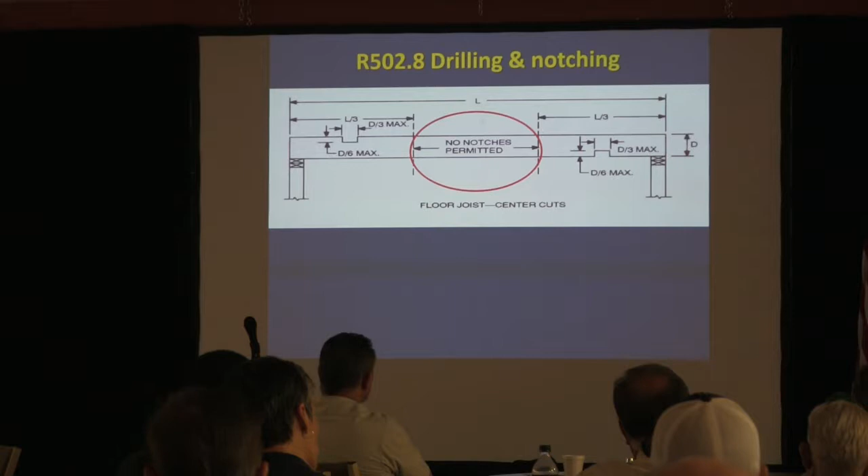Drilling and notching. We know, I'm not going to spend a lot of time, but you don't put any cuts in the middle span of the member, or any notches. You can put holes, but you can't put notches. Why? Because... but why in the middle? That's where you have the most bending, is in the middle. Okay, that's where you can get failure.

And then of course you've got your depth divided by 6 is how deep you can go in there. On the ends you can do the depth of the member, depth top to bottom, divided by 4. You're allowed a little bit more because you don't have as much tension load here, you get mostly compression load here. They come in large cuts, and they come in extra large.

And then, of course, you've got hole sizes for framing members, just like you did the studs. In order to qualify for a hole and not being a notch, you need at least 2 inches of wood on the bottom and on the top. If you have any less than that, it's a notch. And the reason that's important is because in this case, you're allowed to go 1/3 of the depth. You were only allowed 1/6 of the depth, but you can actually have a twice as big opening with a hole because of that extra wood.

And notice how it says actual. So a 2x10 is 9 1/4. Okay, so you divide 9 1/4 by 3, not 10 by 3. Okay, so that's critical here.

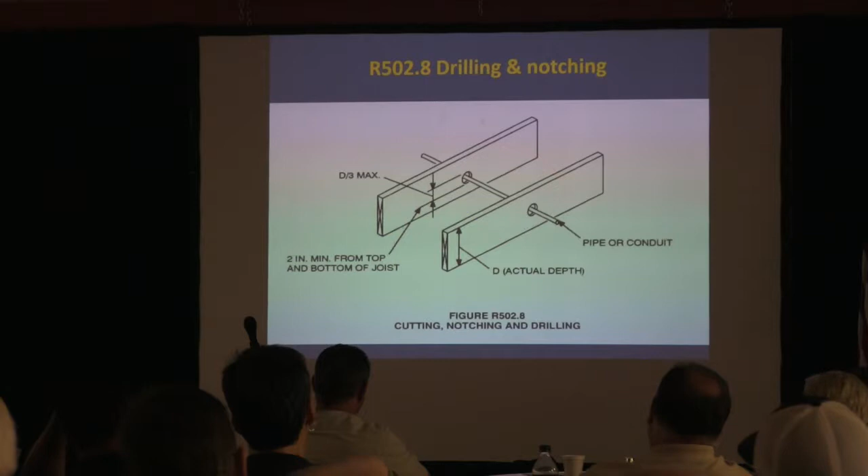And that leads me to this. Okay, so we look at it and you do these little things, and 4 5/8 for a 2x10, is that more than 1/3? Doing the math, it's pretty straightforward, isn't it? Because that's almost half, right, of 9 1/4.

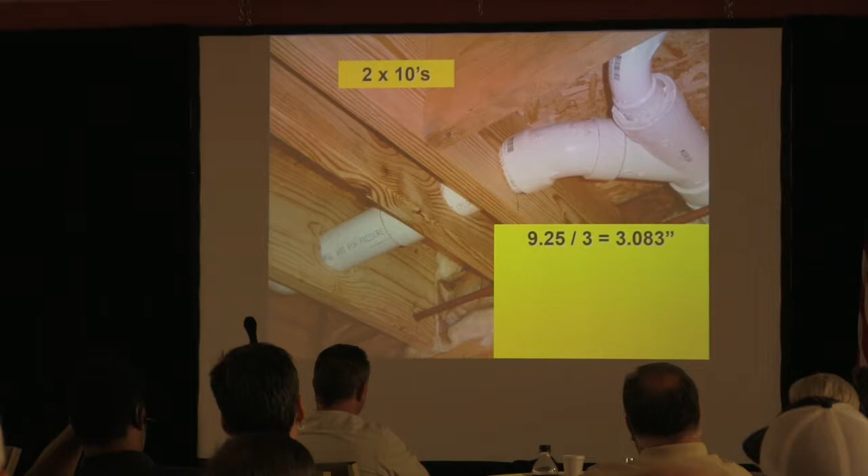And then you see multiple cuts in there, and I just wanted to illustrate this for 2x10s, that if you got 9 1/4 divided by 3, you're a little over 3 inches. So bathrooms, minimum requirement for a commode is 3 inches for a water closet, they call them. They usually use 3-inch Schedule 40, right? Well, the ID of that is just under the maximum hole size. The OD is 3.5. So if you've got 3-inch pipe, you have violated it for a 2x10. Okay? Don't hesitate to sit there and tape it. If it's 3-inch, write it up.

And then, remember, is that 2 inches from the edge? Yeah, from the top, you're right.

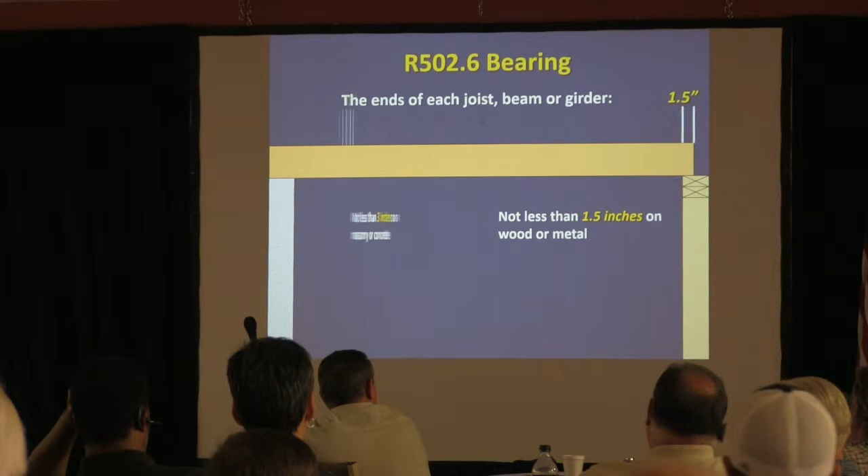Bearing is important too. The ends of each joist, beam, or girder, so that it doesn't discriminate, need 1.5 inches, okay, and that's wood or metal, but it's 3 inches on masonry or concrete because this is much more brittle. If you brought it there, it could shear the corner off. That's why, so you need more surface area to spread that load out.

And you know, I got the question yesterday, yeah, but where's the plate? Well, you may run over to a garage floor. It may run over there or something. It may run over to an area where the plate's on top for the wall, and there's no plate right there. So I've seen it run into a crawl space to just a little divider wall or something like that. You don't see it too much.

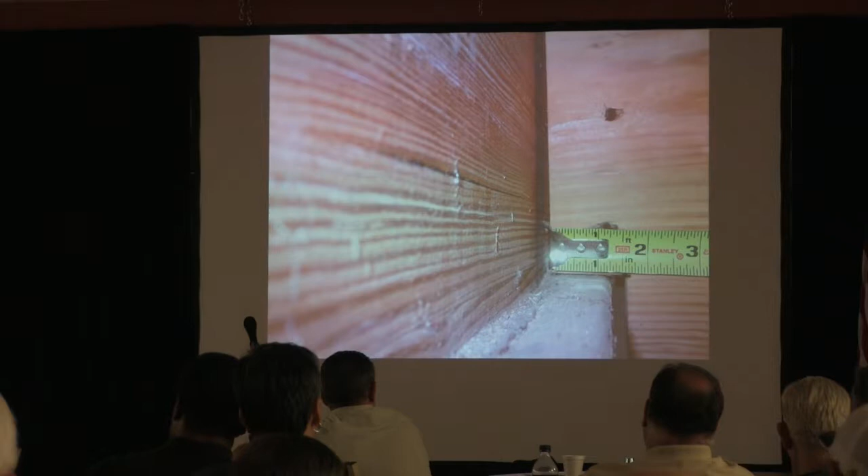These are the great ledger strips there, that aren't really an inch and a half. They're quote unquote 2x2s with the round edges. If somebody ripped them, they're probably going to have enough bearing, but when you buy these ones that are rounded, they're not enough. You're supposed to be out here and you're here.

Also, look under stair landings for bearing. So right here, they probably should just get some joist hangers in there, right? Especially older construction. Huh? Especially older. Oh yeah, you'll see it all the time.

This is new to the 2012 code. I think it came out in 2009. Have you guys ever seen this in there?

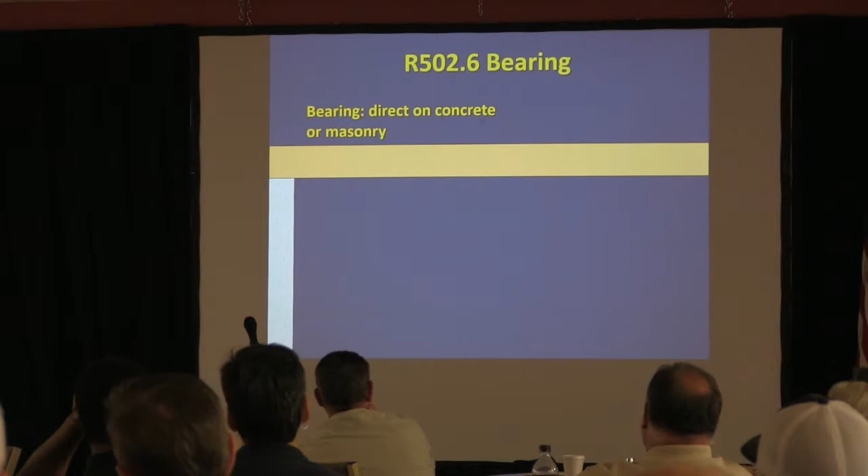When you're on a sill plate, the plate has to be 48 square inches. What are they talking about? What they're saying is if you use a 2x4, it's got to be at least 12 inches long if you're putting something on it.

You're going to see this violated almost exclusively in crawl spaces where there are piers. Almost always. Matter of fact, there's a code change about that. They're actually addressing it for the 2018 code to give a very specific size, because they're tired of looking at the shims and everything else that are falling out.

Well, I've seen them cut the ends off a 2x10, just an inch, and use that to hold up a lumber. Yeah, exactly. It's just a misunderstanding of load transfer. What they're doing is creating a surface area to transfer the load. That's what they're doing.

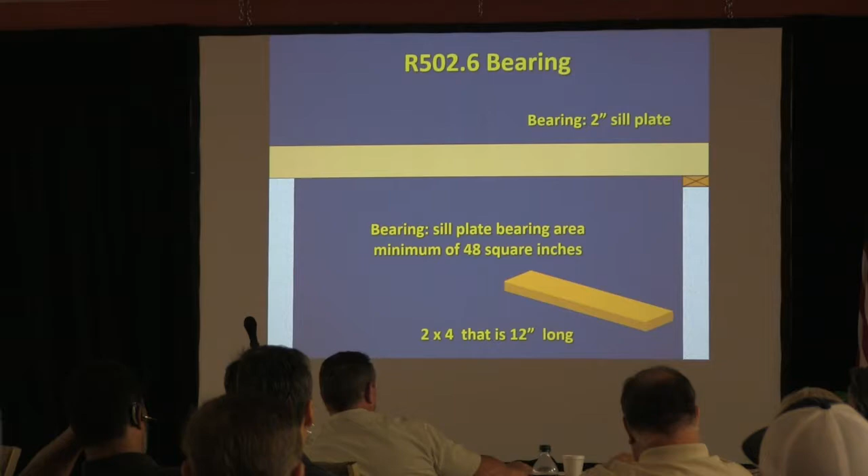And what if it was a 2x6? How long would it have to be? Shorter, because you only have to get 48 square inches. So 48 divided by 6 is... hey, you guys are getting it.

I wanted to show you something that was actually added to the fastening table. If you're using a ledger strip to support joists or rafters, you've got to have 3-16D nails at each joist or rafter. 16! Wow. You think that thing's going to stay intact and not split?

Not if they use that little rounded one. So it's probably just better to use a joist hanger. It used to be. Huh? It used to be. Back up.

It's number 31 on that table, the big table right at the beginning of chapter 6. Do you have permission to move on?

Mr. Jewett, remember the old Forest Products manual for decks? Oh yeah, and it said in it that you can't drive enough nails into that 2x2 to support the deck load of 40 pounds a square foot. That's why I was surprised it was in the code, because I remember Keith and I asked a bunch of engineers one time, and they said the same thing.

The 2x4 ledger? No, the 2x2. You got a 2x4 ledger, you're all right, but a 2x2 ledger... oh, no, 2x2. Yeah, that's what we're talking about.

Well, where's your nail location on the 2x2? On each side of the joist? No, it's supposed to be right underneath it. Right underneath, 3 of them.

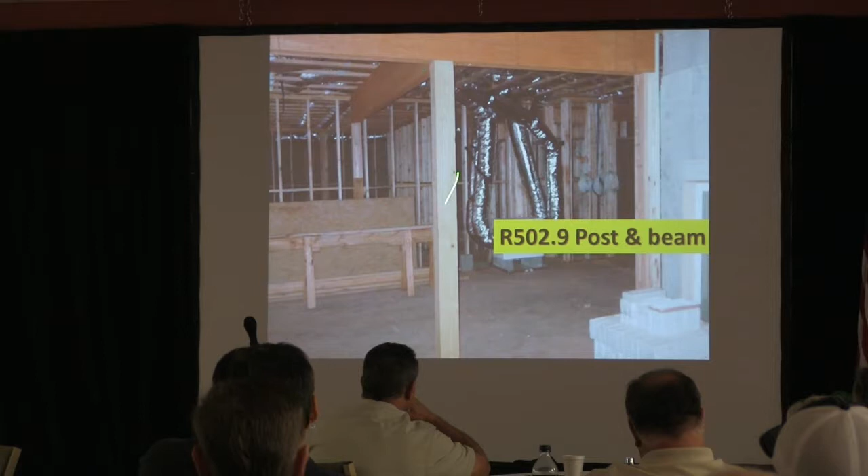See, what happened in this scenario is they overspanned because they picked up this load here. For some reason they realized they needed to build this, this was a custom house. They popped this in and this thing started deflecting, so they put a post in.

The problem is you cannot achieve that positive attachment through toenailing. All right, is this sitting on some kind of base or is this sitting on a concrete slab? That was another story. That was another story.

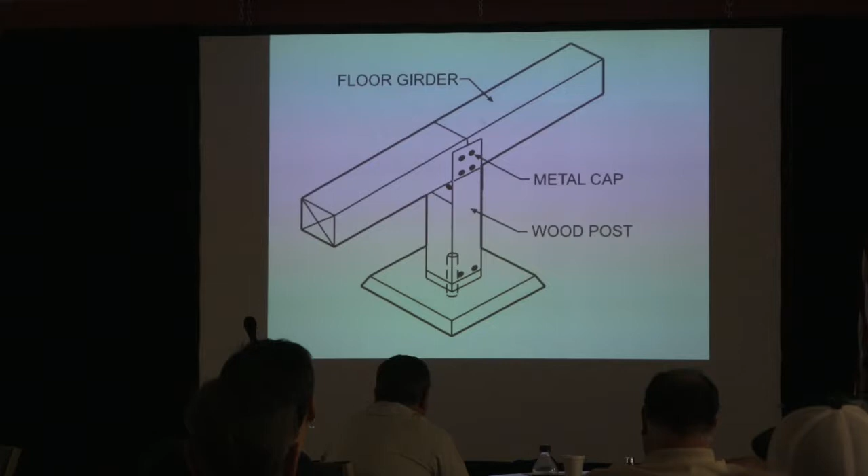Yeah, but that positive connection is for uplift and lateral loading. And what would that look like? Well, they attached it with a staple. Well, I'm glad you asked. See, I'm anticipating, you know why? Because I've done this so much. Put the metal cap on it now though, isn't it?

All right, let's talk about this. According to my sources, this is still a prevalent issue here. If you guys heard this last year, you can tune it out, but if you want to be reinforced, new guys, watch this.

So if they've got a joist hanger, everything's cool, right? Got an issue here. Simpson has a publication that says when you have a joist, you've got to cut it to the correct length. Don't shortcut it. You need to make sure that thing's not shortcut.

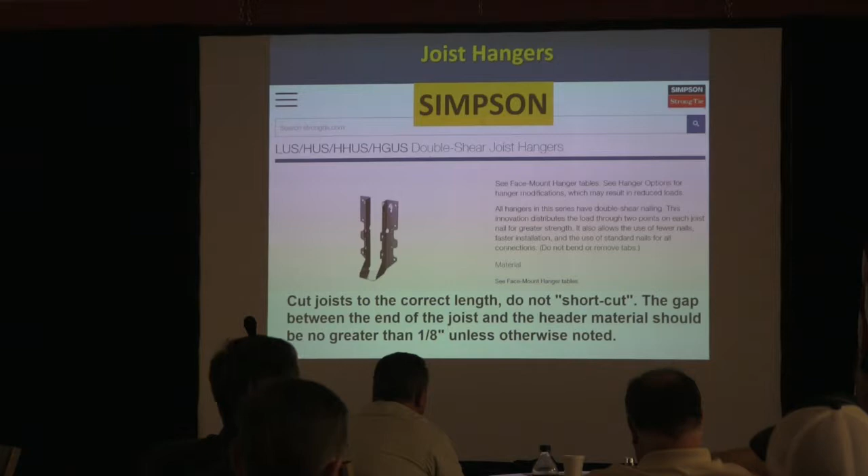The gap between the end of the joist and the header should be no greater than 1/8 of an inch. Got to be tight. USP also does it, and trusses are in the mix. This would be engineered I-joist, trusses, joists, any type of material that has a bearing capacity in a design, you cannot have a gap more than 1/8 of an inch. So they can't just be sloppy. Truss members have to bear fully in the connector seat, be cut to fit against the header, and the gap can't be greater than 1/8 of an inch. That's the industry standard.

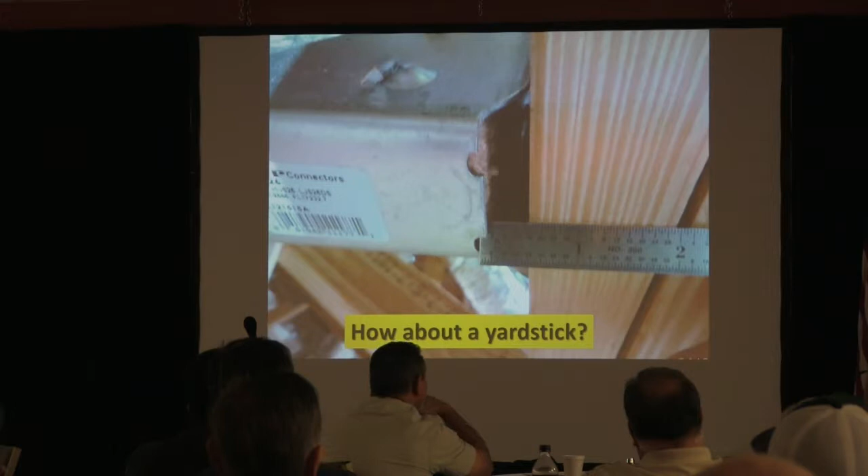And then you see this, and I think we could say that sometimes you might need a yardstick to measure that, right? That's a joke. You guys are tuned out. If it's a deck, you might need a yard. Yeah, that's true. But you can see that these things all are over 1/8 of an inch.

Why is that an issue? Simpson has a nice little publication in their technical notes that basically says that if you have a properly installed joist here, no more than a 1/8-inch gap, you've got proper load transfer from the connector through the fasteners into this beam.

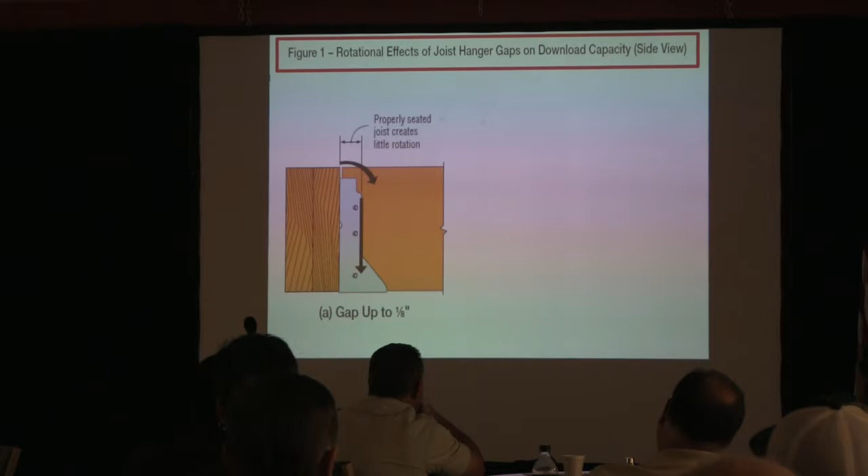Now, the nails they provide are 2 5/8-inch long nails, and they can go in straight, but what about when you toenail? Is there a different approach? We're actually going to deal with that. That's double shear nailing, coming up next.

One thing to be aware of: down the road we're probably going to see some issue where Simpson, especially for decks, will want to go with screws, because you're not supposed to use any fasteners subject to withdrawal for decks, and those hangers are subject to withdrawal. Just throwing that out for food for thought.

So anyway, if you go greater than 1/8 of an inch, now your load's sitting back here. You're not fully seated. What it does is actually create more downward twist force here. That hanger was not designed to take that, because it's supposed to carry the load spread out. It's similar to when we were talking about concrete, you're spreading it out, but now you're just on the back. It wasn't designed for it.

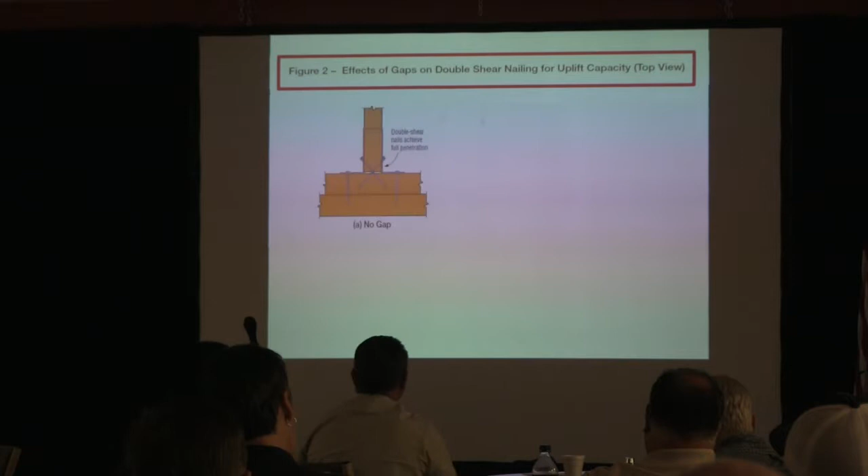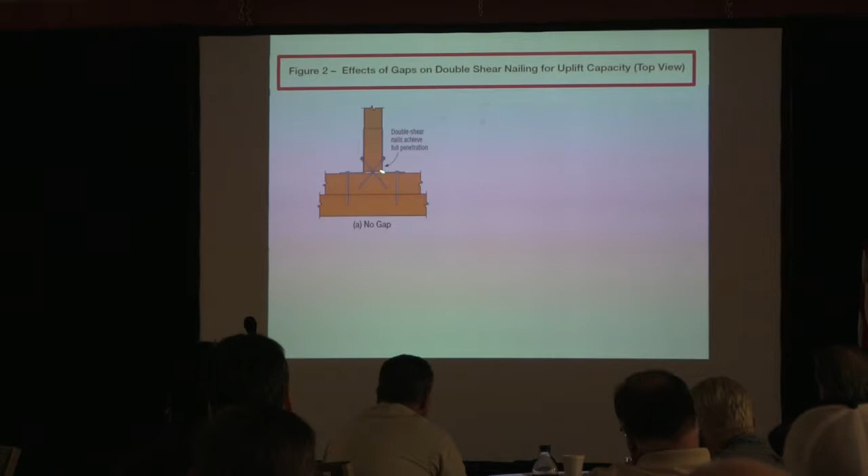And because you asked for it, double shear nailing. If you have no gap, you've got your nails coming into the side that you attach, because it's not just to put the joist in the slot, you also have to connect it to the hanger and bring it into the framing member. This is fine, you've got good wood coming on each side, and that's called double shear nailing.

You get a scenario where you get a small gap. Look how much less wood you have compared to here. That's what's happening now, you're only picking up less, and then if you get too far, you have no nail penetration. So you're really not supporting it the way that connector was designed. That make sense?

Because I want to show them repair options, they show, the question is how to repair it. I would just say to your builder, if they ask, or your client asks, recommend checking Simpson's technical bulletin, give them the number, and see if there are repair options for what you have.

Good way to put it, keep it vague. You didn't tell them how to repair it, you referred them and said see if you have any options there.

One option is you take the hanger off and put a wider hanger. Instead of a single hanger, you put a 3-ply hanger, with blocking on each side - I hate the word scabs, why don't they just say sisters - and fasten it, pick them up, and now these go all the way to the end so you don't have the gap. That's one repair option.

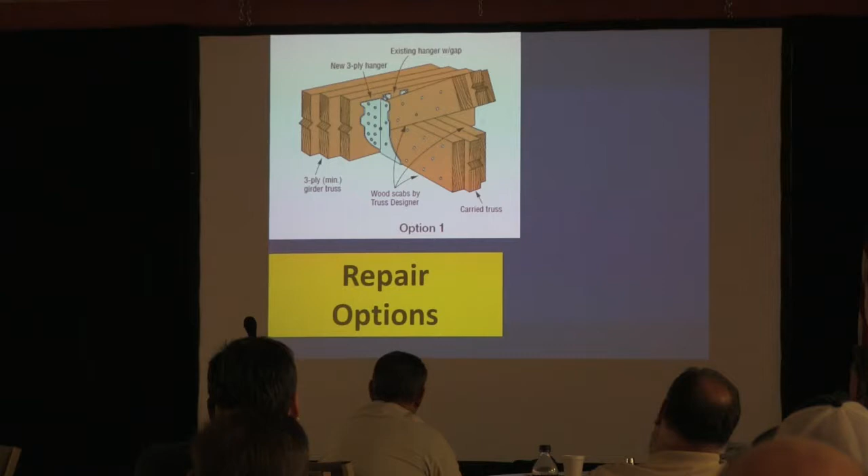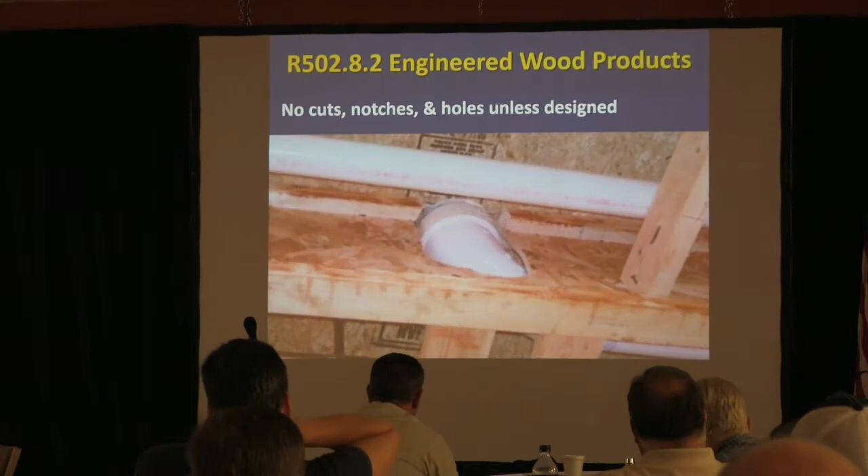I know we're on floors, but we'll talk about roofs too, because hangers can be used for either. With engineered wood products like I-joists, we have to be careful about cutting these things. That kind of stuff happens because most of the time the framer started at the wrong end of the house.

Everybody blames the plumber, but in this case the plumber had a water closet - there's only one place to put this. So it was really a framing issue.

Do the framers have wiggle room, even if they say wait a minute, this was an architectural plan - you didn't do it? Maybe they didn't put the joist in the right way.

Note that almost all manufacturers, this is Weyerhaeuser, will allow you to shift that framing member up to 3 inches. You have to be careful - make sure you support the floor sheathing - but you can shift it over 3 inches with one member, it's okay, rather than compromising that top flange of the I-joist. Maybe you end up having to do another joist if there's a pipe or wires in there, which is a pain in the neck.

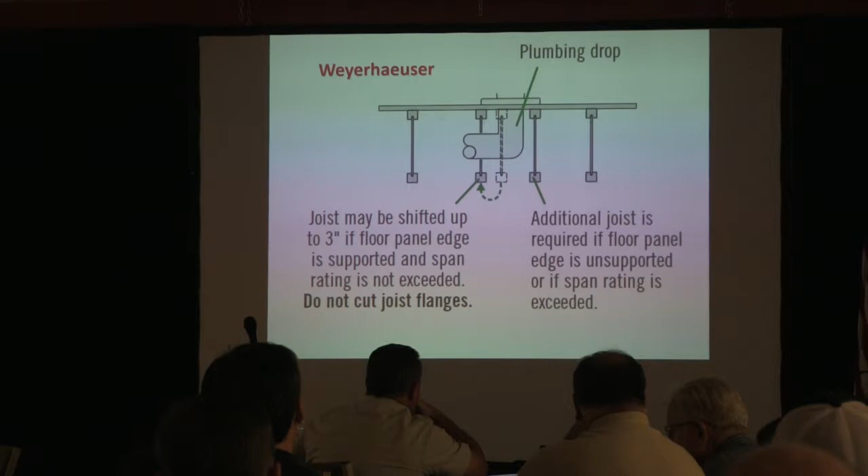Everybody know about holes in I-joists? Every manufacturer has a way of doing it. Weyerhaeuser is the simplest. Boise Cascade actually includes the span of the framing member as an element in designing how big a hole you can put. None of the manufacturers will allow you to cut right at certain points because there's a lot of compression force there - we're talking about that OSB web material.

They've got distances from holes, rectangular or round - usually 2 times the greatest dimension, with a minimum separation required. These charts basically tell you, if you want a 5-inch hole on something that's 16 feet, you've got to be at least 4 feet 3 inches away from either bearing point. That's really what it is.

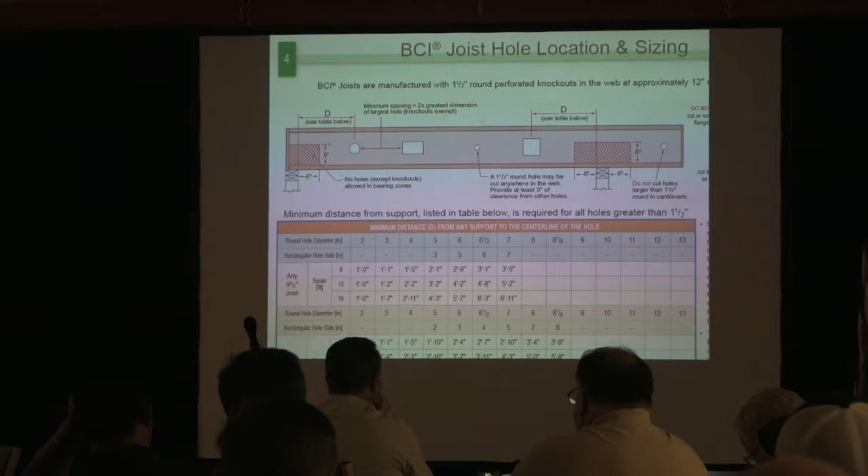I have seen that, right where the end of the joist butts into that. Even if they didn't have it - aren't the ends of I-joists supposed to have squash blocks?

We're getting there, we're getting there. Don, you're gonna be my PR guy, I'm gonna hire you for my marketing, because you just prep everybody. He is my plant, I'll pay you later, don't worry.

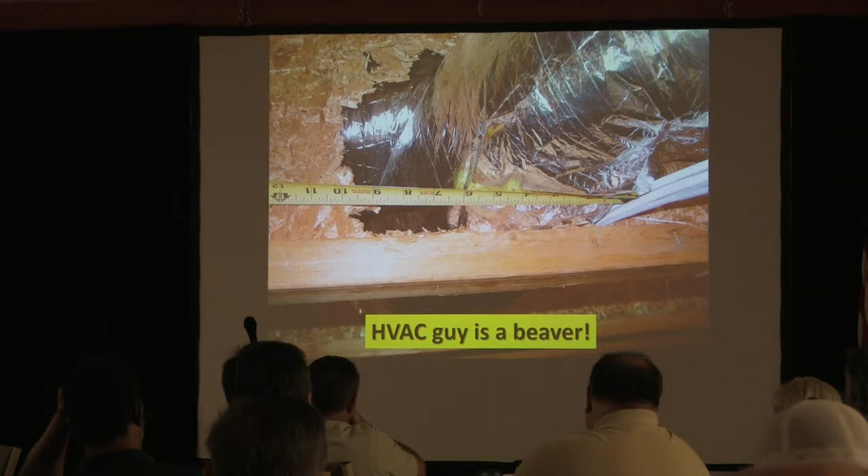So this is almost comical - and then the HVAC guy's a beaver, chewed all that, bam bam bam. And then, well, the deck's secure.

Again, this is a bearing point right here, so this is now subject to compression forces.

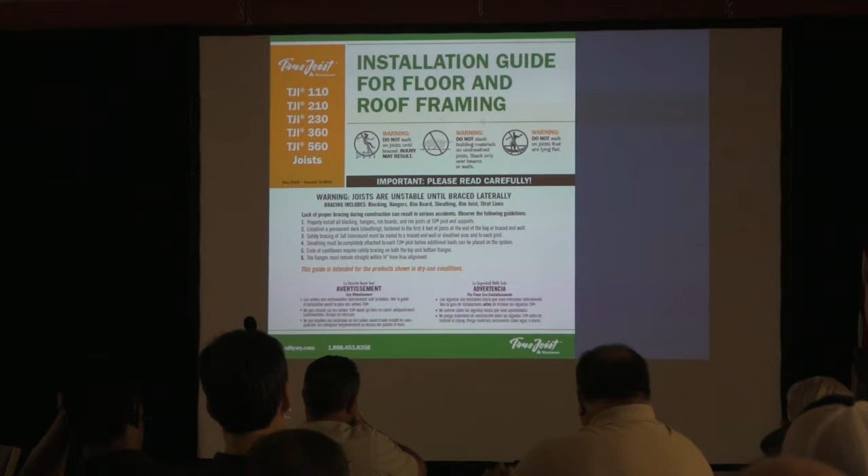These guides are great. You really need to have a file for them depending on the manufacturer. You can download it on your phone if you're on the job site. Just look and see who the manufacturer is of the product, and look for the detailing of your I-joist. They give you labeled areas, and then they'll show you greater detail of fastening and additional support.

I'm going to focus on B2 because Don wanted to, so I'm going there. We're going to talk about blocking. When you have a load-bearing wall above here, you may have to include squash blocks. In this case, they're using 2x4s that are a little larger, 16th of an inch larger, to pick up that load and protect that flange and that web there.

And they might even require a web stiffener, which would actually go between that blocking and the OSB. Again, you've got to look at the details. Typically, if you have a cantilever or something like that, you're going to require that. This is one thing that you'll see required here with a load-bearing wall.

And again, when you have hangers that are top hangers, you don't have to have any web stiffener. You can have a gap in there, because it's picking up the top and the bottom flange. If you've got a joist hanger that goes all the way up to the top flange, that thing's not going to rotate if they don't have a spread. However, if you have a hanger that's too short that doesn't go all the way up, you're going to have to put a web stiffener in there.

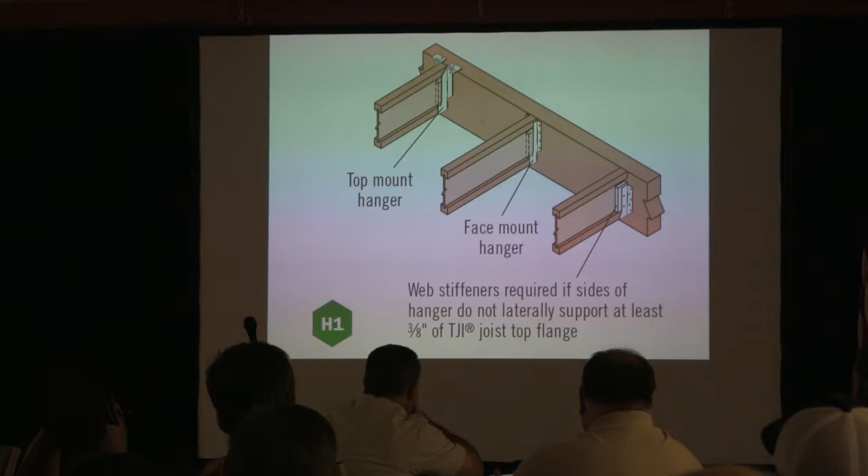What does that look like? Looks like that. This is where you need a web stiffener, because that hanger did not go all the way up to keep it from rotating. Same thing here. Probably didn't have it. These are high enough, but because they had a double, they were out there, back ordered.

Is that across multiple manufacturers? Is that kind of the standard? Yeah, and that's a good question. That's kind of like I was showing you with that header. It's the wood I-joist manufacturer, and they actually have used the ASTM to set their industry standards. When I see issues like this, you can cite manufacturer's installation, but you can also, at the beginning of chapter 5, cite that they've got to conform to that ASTM standard, and that's all the installation and design standards.

So you want that one? That's the one you want? Okay. And sometimes you're going to need a backer block if you're using a doubled up I-joist as a girder. It may require you to put filler block in there to stiffen it, and you may need to have a backer block to install when you're actually hanging it at that point.

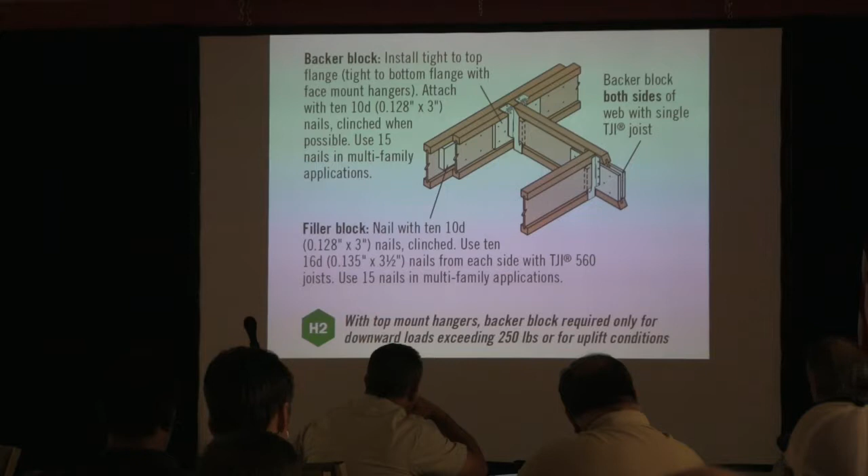Again, that's the H2, and I'm not going to spend a bunch of time, just showing you some of the possibilities where you might find issues. I'm bringing this up just to show you. I was showing you Trus Joist, which is Weyerhaeuser. I'm just showing you that it does go across into different manufacturers, because this one right here is Boise Cascade, and they've got the same detail. So most brands are going to tell you the same thing. The reason I said most is because there are some obscure ones that I'm just guessing would probably follow the standards too.

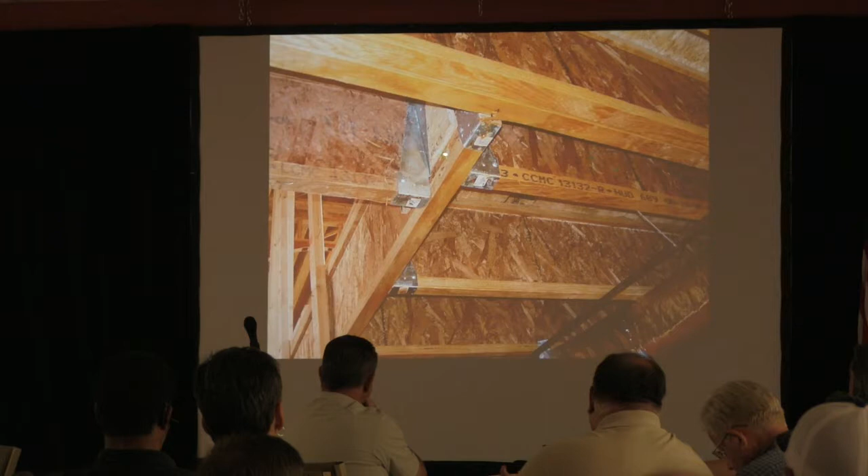But you can see a situation here where they did put the backer block in, so I'll show correct installations too. See the backer blocks there. So what is that needed for now? I guess I don't quite understand. Well, you're using this guy as a girder. He's picking up all these loads here.

So in this case, it's a real short span. This is the bottom of the stair. So when you bring that in there, you're using this member as a girder. It's just a single I-joist, sometimes even double. You've got to have a backer block here because you're resting that flange there. You're actually trying to transfer surface area into this member.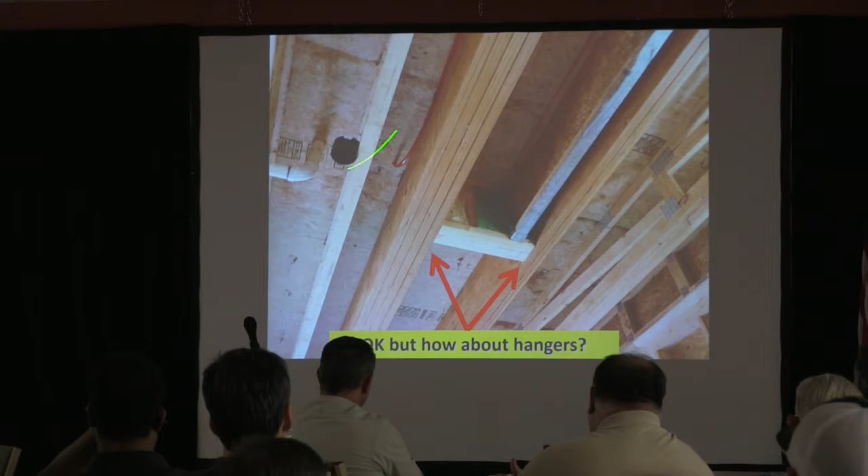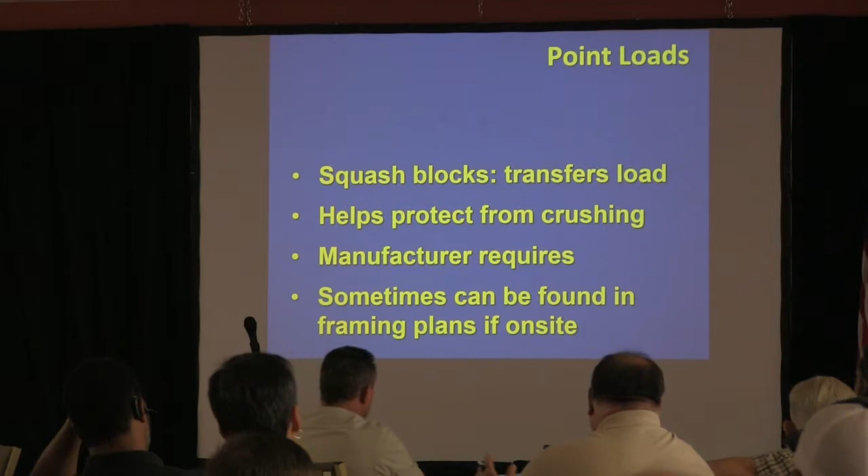So then we also have squash blocks. This is similar to what we're talking about, but instead of having a bearing wall, we might have point loads from a lot of different things. They transfer the load and bypass that I-joist, helping protect that member from being crushed. Manufacturers require this, and a lot of times a good builder's lumber supplier will actually make a plan for it, and it's going to be in the box a lot of times.

So just to demonstrate, we have created a window. We put a header in here, right? Got a header right there, so we're carrying all the loading from here. We're bringing it around each side. Now we got point loads, don't we? That's not a uniform load. We got point load here and here, and if we got I-joists, we may need squash blocks there.

So you'll see again, they're supposed to be within 1/16 of an inch, and a lot of times you might say, well, they're not there. How are you going to put them in? Well, they should be kind of hammering them in, this stuff, huh?

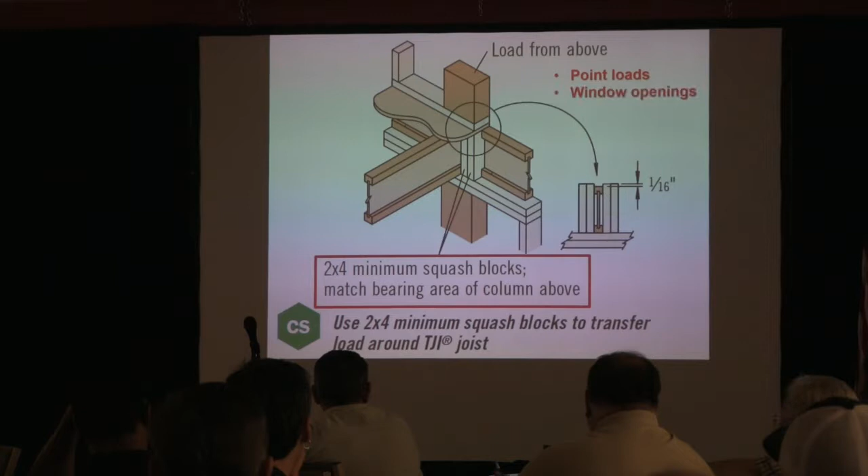So anyway, that's what you should see there on each side of the framing member. But they need to match whatever the bearing area is above. If it's wider, they might need more. You can get them from window openings, door openings, or just a column load.

This is an example of a plan that was on site when I did the inspection, and all those are places where you're supposed to have squash blocks. It makes it easy to find.

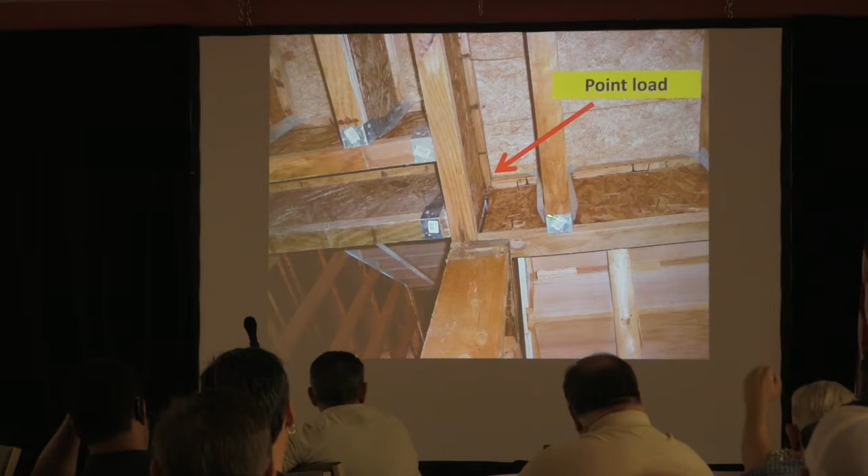We got a point load here coming down from above, and we got a little bit of a problem here. In this case, we've got this I-joist like in a stairwell. I got a load coming here, and it's actually crushed. I wish I would have had this picture, I couldn't find all my pictures, but this one was just all terribly destroyed on the other side.

LVLs, they're strong, but you got to be careful. Sometimes they're not allowed to have any cuts. There's specific areas where you're allowed to and not allowed to touch these, so be aware of what they are.

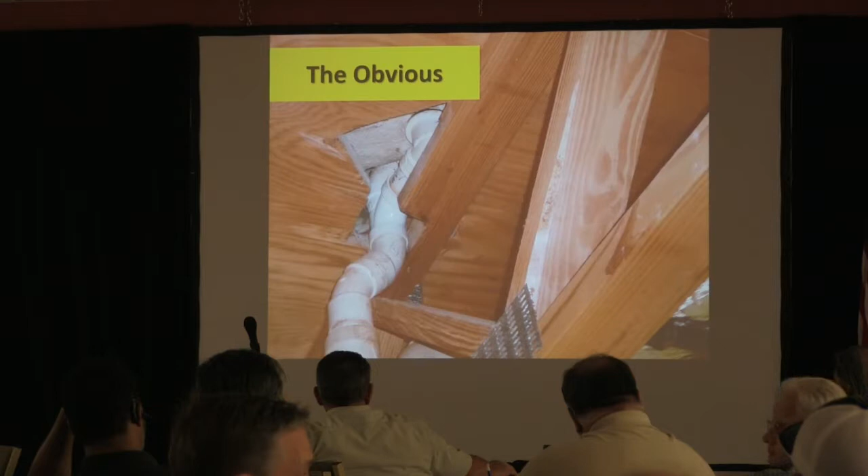Open web trusses, we want to be aware of those. The obvious thing is you don't cut any framing member on these because they were designed to work as a system. They need to be engineered correctly. The manufacturers do tell you, don't touch them, okay? This is Robert's language - don't do it.

Right, Robert? Can't you just fill that with the fire caulk and? Well, they do.

And sometimes you got a little bit of something that you're not as aware of. See, you got all these double-ended trusses here. Well, somebody broke one off and then they put some filler in there. That'll be in a staircase. You got it.

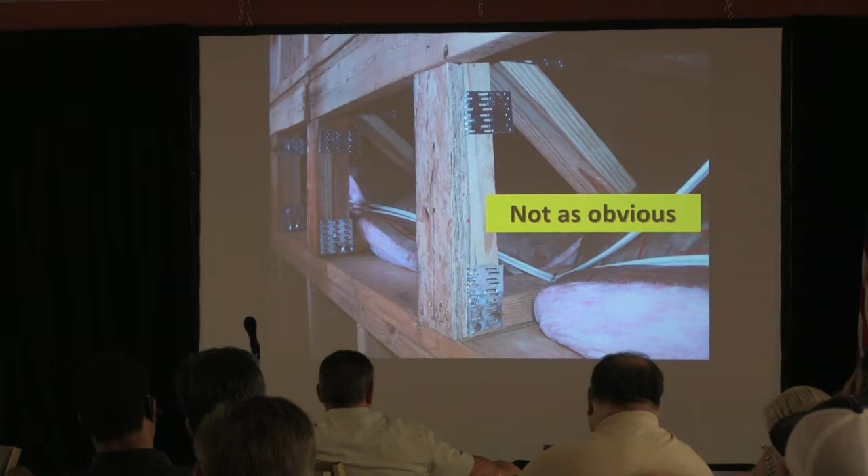And then this was one that had too much load on it, and at the end, sometimes the plates pop. Just write them up.

And I know I showed you guys this last year, but I had a house that was over $2 million on Riverside. Probably over 60% of the trusses from the basement were popped like this. They spent a couple days out there with a hydraulic press fixing them all. Okay? But how much is too much of a gap?

1/8 of an inch, you think? Is that good? Sure, why not? Okay, let's look at the 2012 IRC.

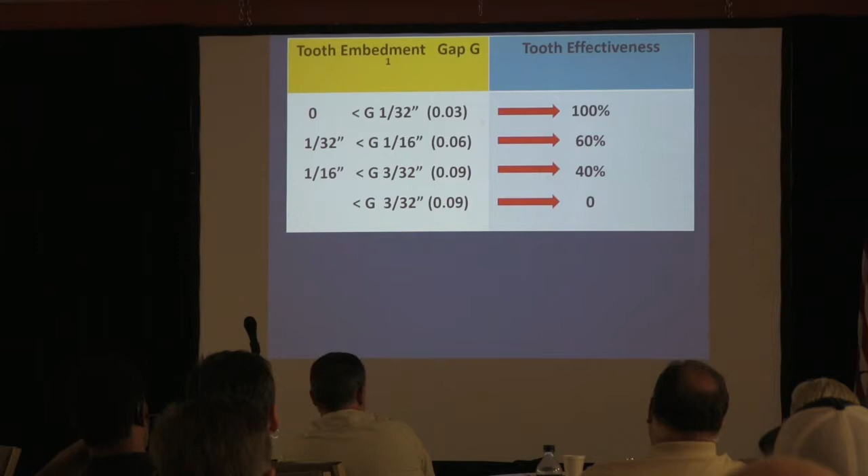So with a gap up to a 32nd of an inch, you get 100% effectiveness of the design value. Go from a 32nd to a 16th, now you're only at 60% of the design value of that truss. From a 16th to a 3/32nd, you're only at 40%, and once you're past 3/32nd, think about that—that's not very much—you have 0% of the design value because it's almost not even touching, since those plate teeth are only so long. So be aware, if you see them pop, write them up. Just to show you, these actually have an over-design safety value built in: if there's no gap at all, they really are at 119%.

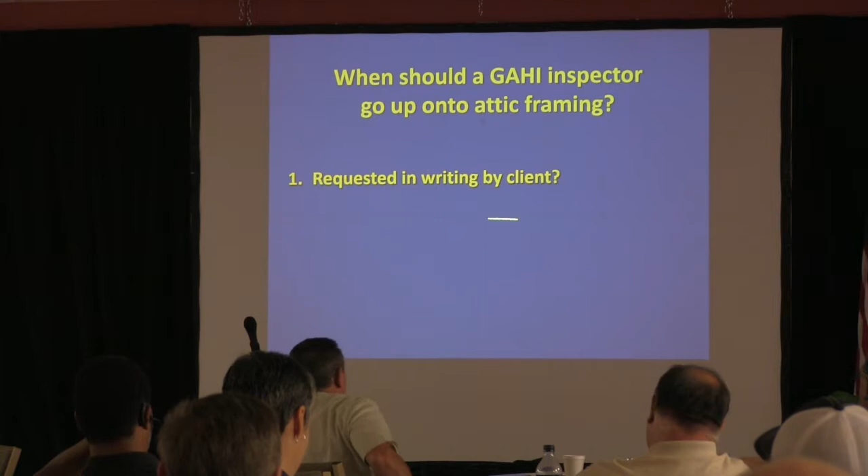Attic framing, just real quick, I'll pop some up. When should a GAHI inspector go up onto attic framing? Winter. In the fall. When it's requested in writing by a client? Is this true?

Who's that? That's Paul Maxwell. I've got to tell you, Paul—one of the younger inspectors came up to me and said, 'Get him down from there, he's gonna fall.' Paul, tell him how old you are. 75. That's Paul, that's 2 years ago, buddy. I ain't afraid of no height, am I? But it just shows you're so used to it, and there's a careful way to be up there. But you did scare a guy—he aged 10 years when you were up there. And Alex knows who I'm talking about. Alex was afraid for you. Remember that, Alex? I was impressed. I asked him what it was. Apple cider vinegar.

All right, so I've got a rafter up here with a bad chunk out of it. Can I write that up as a code violation? Is it just a split? It's not a split—it's just a big old nasty knot, a long knot.

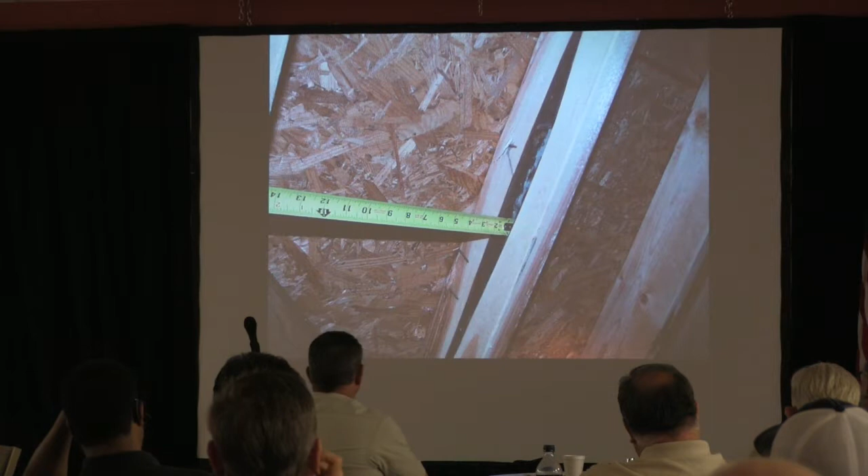So I can probably say that it possibly might be a load issue. I can cite 801.2, that the rafter may not be sufficient to transfer a load, or I can say we've got a grading issue. That's not 2 members, that's one—that's one member, that's a rafter. So you might be able to use it from a load perspective, or it's not graded properly.

Because lumber is visually graded—how many times do you send lumber back that says it's supposed to be one thing and it's twisted or knotty and everything like that? A lot. Yeah, they try to pass off garbage on these guys all the time. It's gotta go somewhere. That's right.

So there's a couple of codes I want to look at here. There's code 802.3 that talks about ridges, rafters, hips, and valleys. Ridge boards can't be any less than the depth of the rafter, and same with hips and valleys.

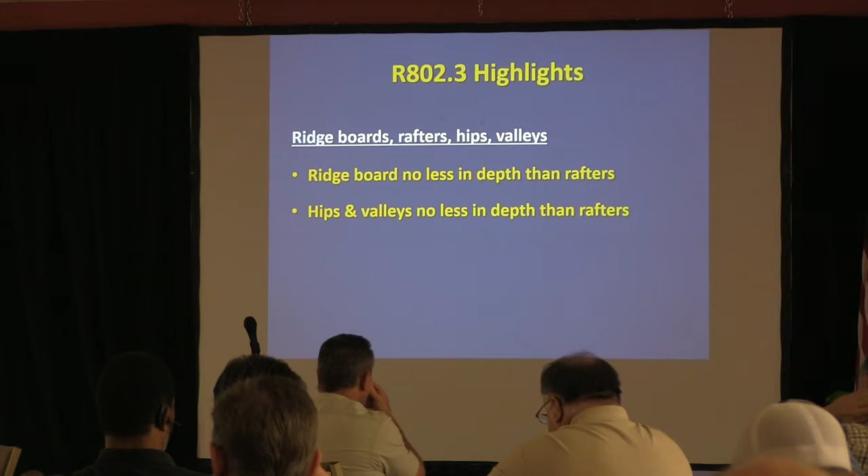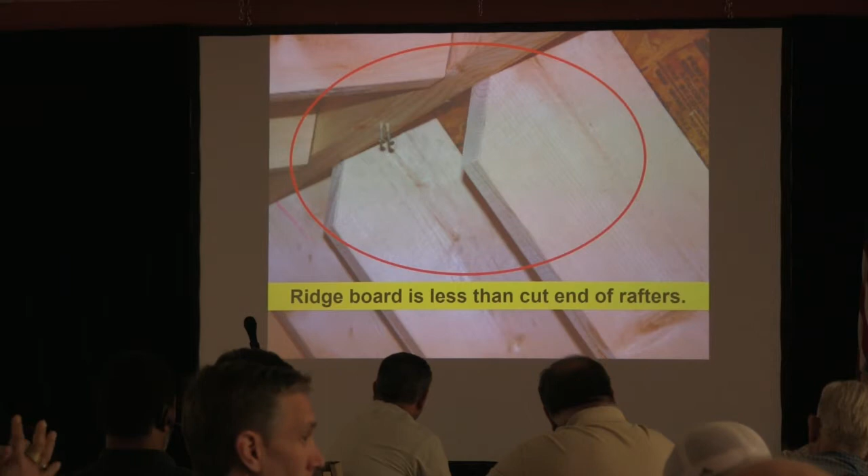The jack rafters, when they hit a hip or a valley, that valley or hip has to provide full bearing for the jack rafters. Hips and valleys also have to be supported at a ridge. So this is a scenario where you're not getting full bearing at the top at a ridge. When you cut the corner off, then you are. There you go—yeah, you go like that.

You diagonally cut the point. This is what happens when you end up with non-support: these things move and twist and you get cracks. So the bearing on the ridge stopped there. This is unsupported, and all the way down the line I had cracked rafters because you get a lot of movement.

No full face bearing here, is it? See, when you touch it, most of it should touch. When you have a ridge and the hips coming together, you've got to have bearing up there.

Sometimes you'll see these little gables or bump outs, these little dormers on the front, and they'll just be floating out there.

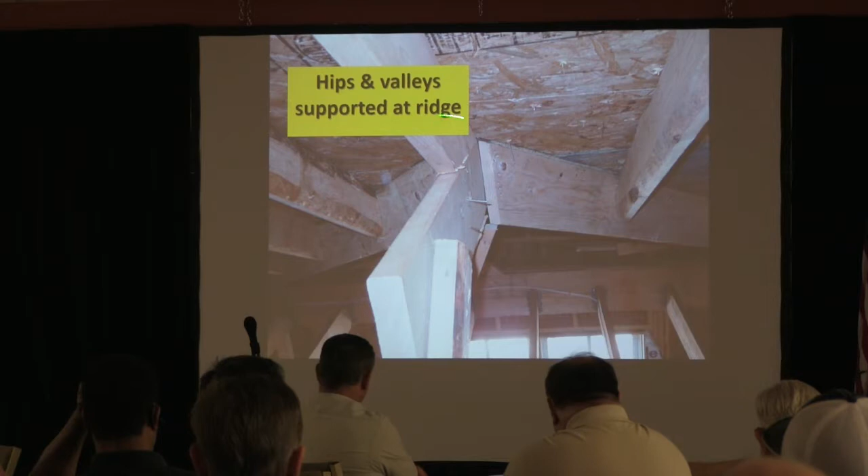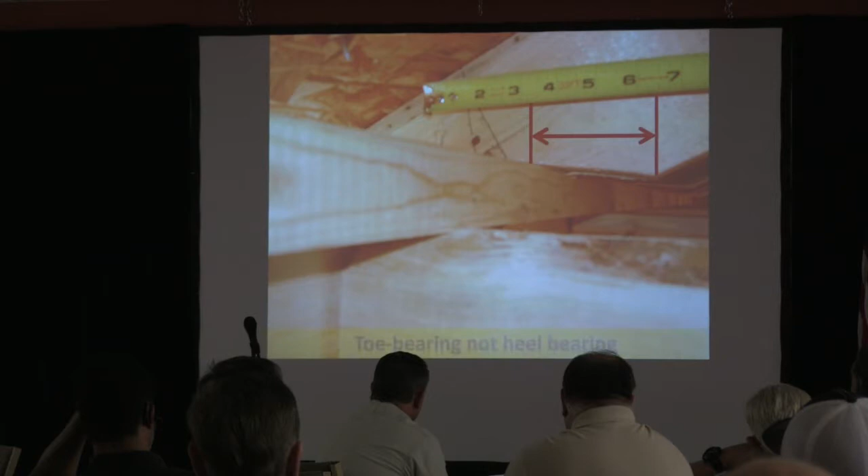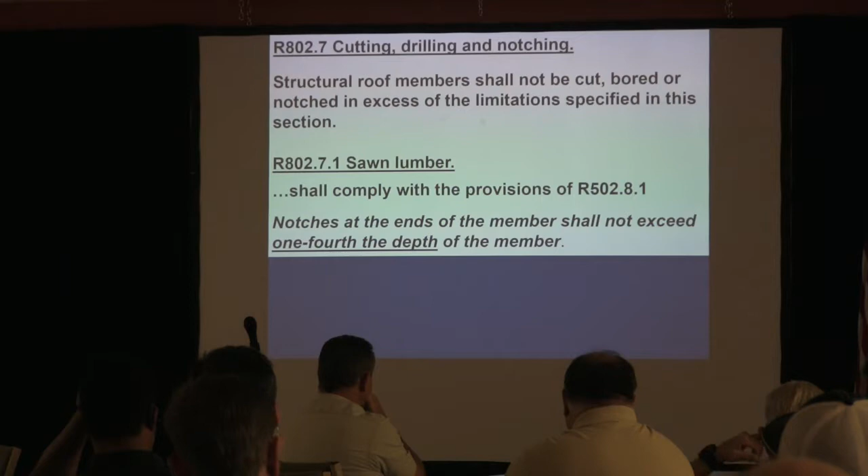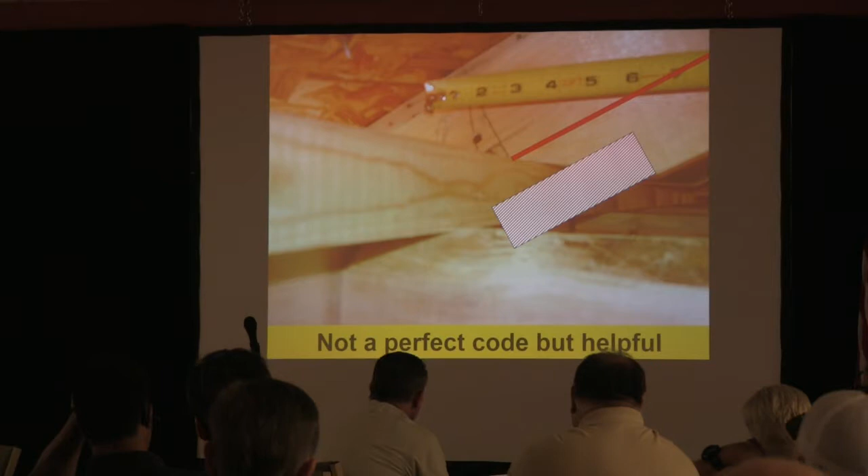You start cutting it up and pulling it out there, okay? See, that's 1/4 of the depth right there. So you can use that code if you want to deal with it. And then sometimes you just got to make it, dude, because friction fit ain't getting it.

Is there such a section? What's the maximum overnotch in a purlin? Paul? None. Thank you.

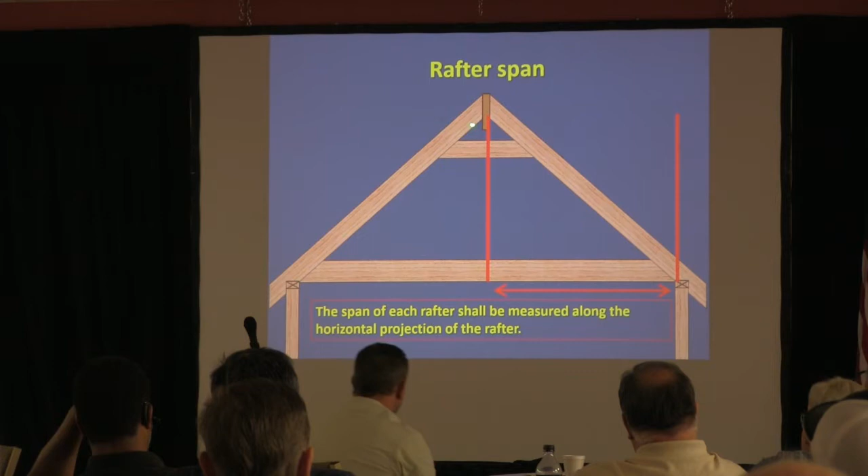Purlins, just to show what they're there for, are designed to allow you to use smaller size dimensional lumber for your rafters. When you measure rafter span, you measure it from where it bears at the top to where it bears on the wall. That's your span. For the size of roofs we use, a 2x6 shouldn't be able to be used if you ran it all the way from the midpoint to the end. I'll show you why.

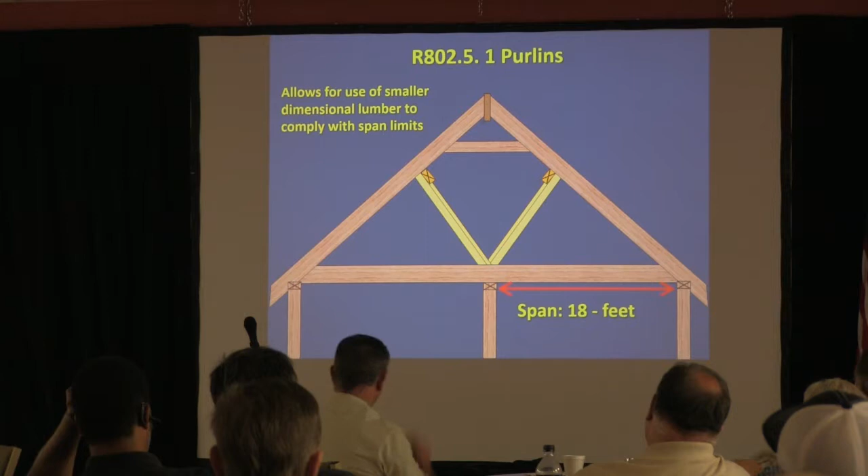If we go 18 feet from the ridge to the wall using 2x6 Southern SPF number 3, we need to put in these purlins right here, running this way, with a T-brace coming down to a bearing point. What's used a lot for stick-built attics, SPF number 3 at 16-inch centers, maxes out at 10 foot 10 inches, so we're well overspanned for 18 feet. By doing the purlin, it's a girder. We measure from the ridge to the purlin, and if we're at 7.6, we're within the 10.10. We go from the purlin to the wall, and at 10.6 we're still within the 10.10, and that's why we can use it.

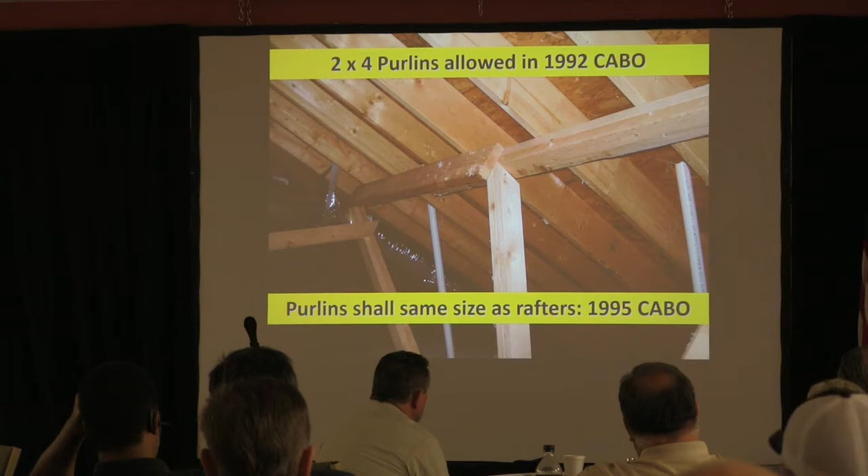But you'll run into this a lot with houses built up to about 97. The code actually allowed you to use two 2x4s flat. Doesn't mean they're right, they just allowed it. But with the 95 code, which we adopted in April of 97, they actually said purlins have to be the same size as the rafters they support. So when you look at that, this guy didn't get the memo.

And then also, purlins have to be continuous from bearing point to bearing point. Makes sense, it's a girder, so you don't splice it.

So when you say it's a purlin, remember it's like at the top of that brace, perpendicular, edge nailed for support. The purlin is turned sideways. How many times do you put a floor joist flat, like a plank? It doesn't work, the boards didn't work, that's what I'm saying. We don't throw them away, we just add the 2x6 on top of them, right? Well, the 2x6 has to be supported, it has to be nailed to something. Here you've got a purlin, and then there's a brace on the back side. A lot of times you see this brace go up and support it. This is the purlin.

Okay, gotcha. But you know, I can show you picture after picture of unsupported purlins. You'll find this is probably the most common violation you'll see.

What's the spec on the brace? It's got to be a minimum of a 2x4, and if it's over 8 feet, it's got to be braced. They don't tell you how to brace it. We see angles connecting the braces, so an unbraced brace is unpermitted after 8 feet of length.

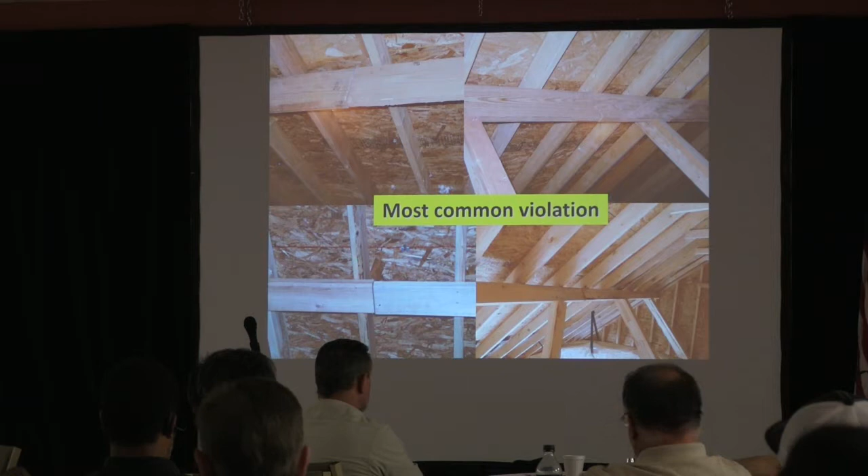Paul did a lot of research on purlins and will get into the detail. But I'll address one of your issues, the compound one. There's also a maximum span for a purlin of 4 feet. You can't go over 4 feet, and then you've got to put a support in.

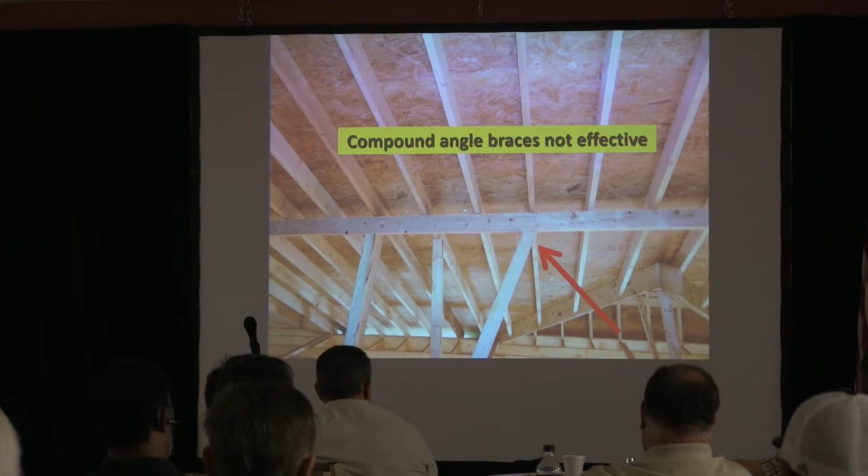So you have compound purlins at a compound angle. The purlin runs one way to the rafter, but sometimes it's kicked over because you may have a tray ceiling or something, so it's angling this way too. They're not effective, they're not doing anything really. This is what happens if you try to sit something on top of it - it doesn't even fit. So compound angle braces are not effective.

What they should have done is run something like an LVL and bring it down to the LVL, because you can't put it on the tray ceiling. That's really what it is. You'll see a lot of that.

But don't forget about ceiling joists - they need hangers too. Another option, they could have stepped up to a larger size piece of lumber than they had carried.

That's true. Just want to point out there's a publication that both Chapter 5 and Chapter 8 of the truss sections defer to. You can use it for the bracing of your trusses for attic and stuff.

I'm going to get through this. Have you guys ever seen trusses like this? These are called piggybacks - two sections of trusses. The number one thing you don't see here is the diagonals. We're at the living areas down here, we go up and they're missing these diagonals.

I've rarely ever seen one done right. I had a situation where the builder or framers didn't know why these things were longer - they're longer because you've got to have lateral bracing, continuous lateral bracing. This actually kicks the top truss up higher to put those in there. They didn't know what they were, so they cut them all off on both sides.

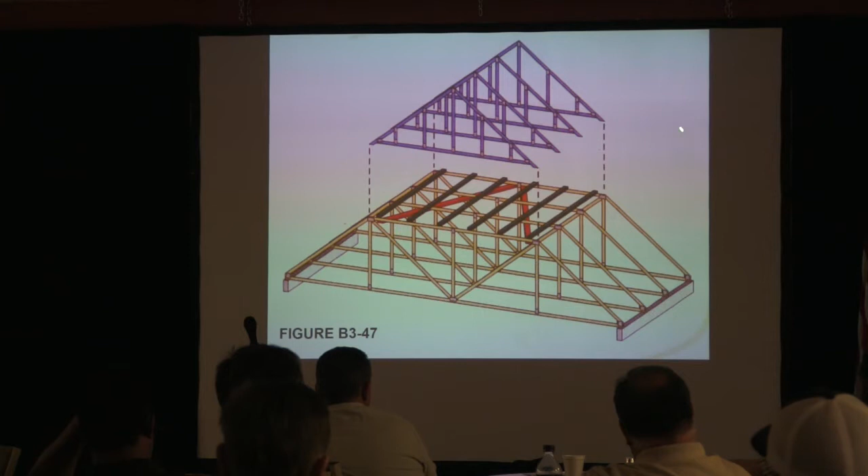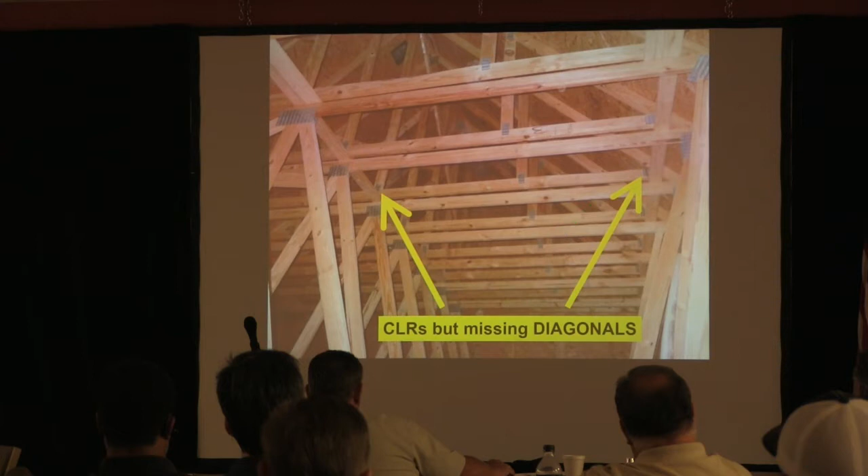And this is what it looked like - they were flat and nice, but what's missing? Well, that's how we attach them, and there's no lateral bracing there. This one does have the continuous lateral bracing, but they don't have any diagonals up there. Again, you'll be writing that up all day long.

Would a 1x6 work at the time? You're going to have to look and see what the spec is on it. You don't get damaged plates, drilled holes, missing plates, cracked webs - these are things we need to look for here.

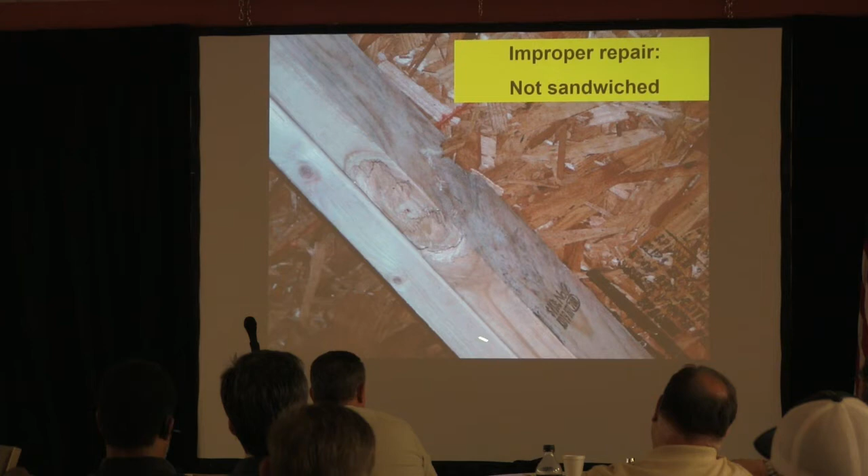So where knots are, they're going to crack. If you see them put a sister on one side only, it's probably improper. You don't say it's improper, you say recommend confirming that the repair was done correctly. Most engineer truss repairs require a solid repair material on both sides of the break.

I know we're getting late, I'm going to whip through these a little bit to show you. Now this is a great picture because we also have to be careful that if we get too much load on this thing, we've got to make sure we protect it. In this case, this is Russell's picture - this last truss, the bottom chord's too small compared to these, so they actually added some framing material.

Is that 2x4? Is that what that was? It's a 2x4 chord, bottom chord there. What they've done is - this is designed to have people and HVAC units on it - they had the wrong size truss there, so they just filled it up to connect to the floor sheathing. You've got to make sure these are designed for all the loads for units and people going up there.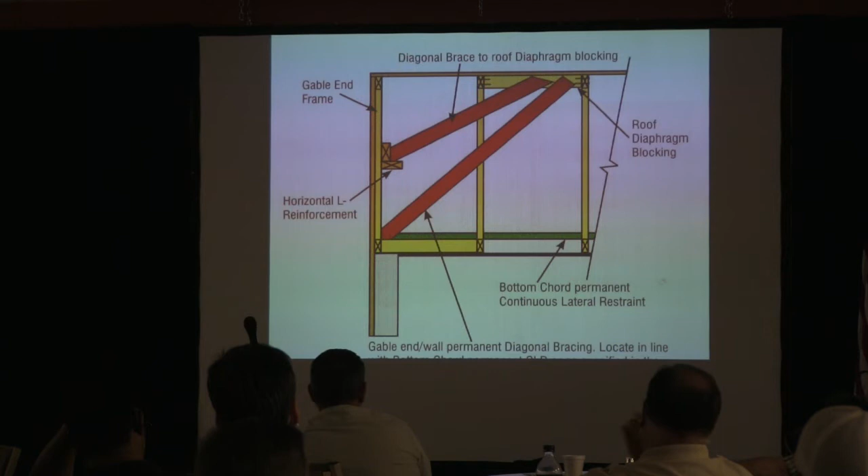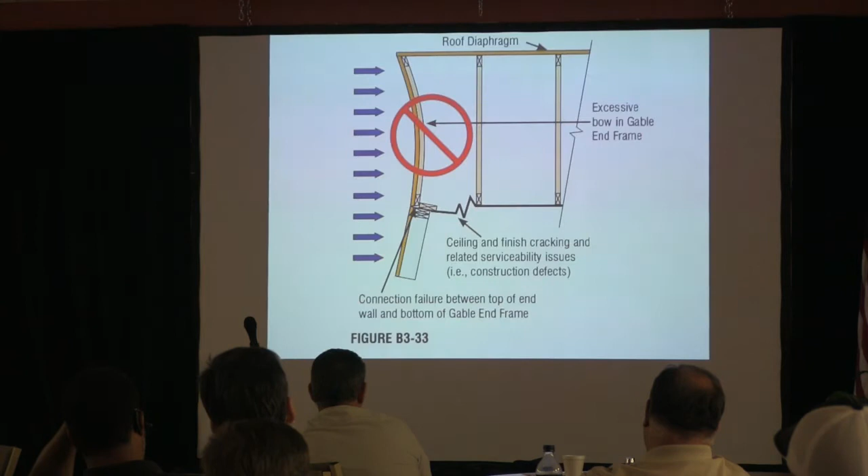Usually you'll see them going this way, but the biggest thing is there should be blocking between the roof trusses to transfer and share that load, because this is the gable end wall that's got wind coming in on it. This house right here wasn't very well done, but they had it there, and it went down to a single truss that had broken off, actually broke off there. This is what we're trying to resist happening.

By not having blocking in there, it's just going to move. And like this, what the heck is that? What does that do? You just see a bunch of stuff that they just throw out there.

Nothing on this one, there's nothing on this wall. You want to see the outside of that wall? That's what happens when you've got a brittle material, whether you have brick or stucco. It's going to move and it's going to crack, that's what it's really doing there. So now, this is a weather barrier, don't forget, and now you've just compromised the weather barrier.

Foundation, real quick, that's what you're going to deal with a lot, because these foundation ties will leak.

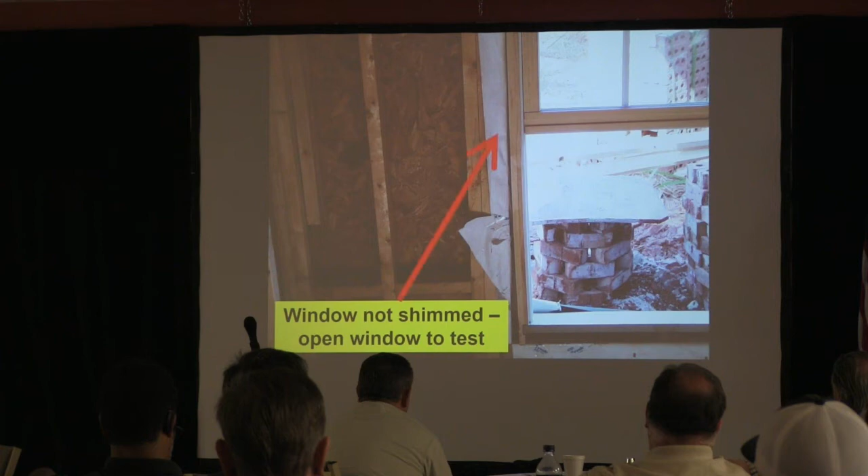We're almost done. I want to deal with just a couple things on some flashing issues, and windows. A lot of times you'll see them cut the straps on these windows before they put shims in. What happens is that window will bow. Two things happen: if the window's closed and you unlatch it, it pops out if it's a pop-out window, and that can be dangerous. Second thing is your little window test, try to lift it. Because it's bowed here and pinches here, you can't really lift it up, it'll stop pretty quickly. So keep an eye out for these things, because what you need to do is not say it's installed properly, you just say notice no shims, recommend confirming that the warranty is not voided.

Good way to put it in your report, because really that's what you're trying to avoid.

Something I've seen every now and then on these truss frame roofs: you go to the building, the roof's all done, you look over on the burn pile, and you've got two or three crushed trusses burning on the burn pile. Somebody made a mistake here. Oh, you'll see that a lot.

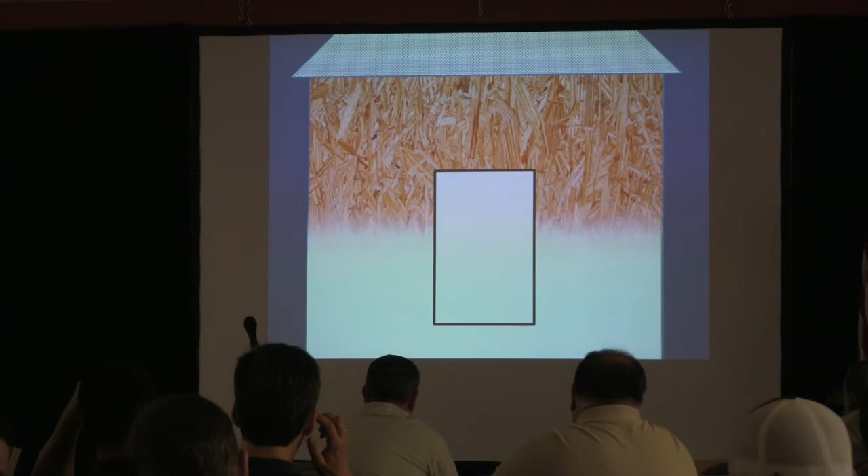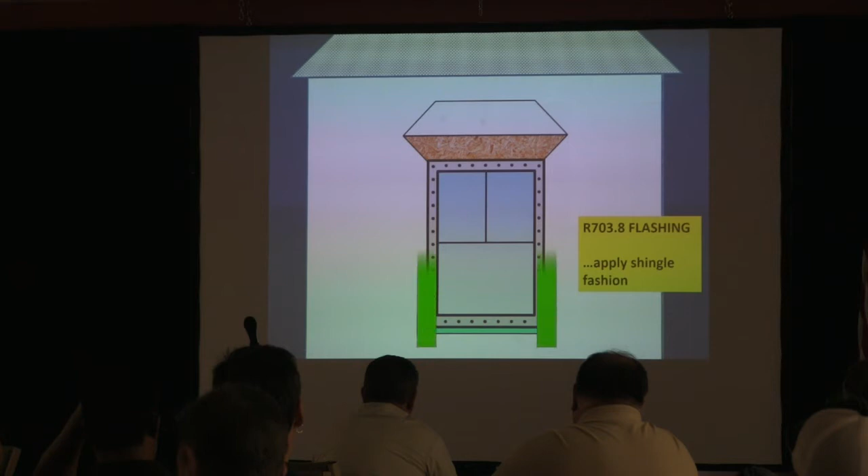Two quick things here, about the flashing on windows and doors. So we'll put this window here, and we'll go ahead and put house wrap on this thing. What you're supposed to do is cut this back, pin it up, and apply flashing in a shingle fashion. You put your bottom flashing in there, put your window in, then run up your flashing on the side, typically you're seeing peel and stick. You run it across the top, then bring that down and tape it. That's how it's supposed to be done.

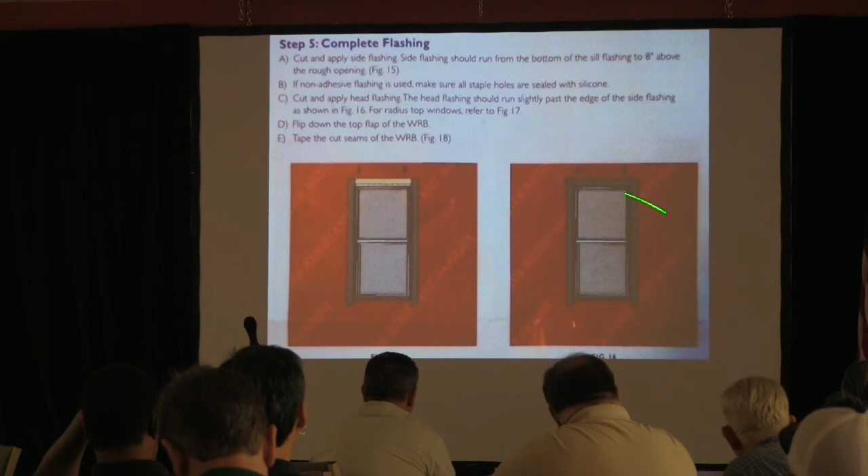And when you see this stuff just slapped on here, and the house wrap actually came under the window there, you're going to have leak points. This is a nice high-end home with good quality windows, and it's a shame. Two installation instructions were violated here: the window manufacturer provided their own installation instructions of what I just showed you, and the house wrap manufacturer, same thing. So it's out there, but you'll see this a lot, because a lot of times the windows can be in when you're doing the framing.

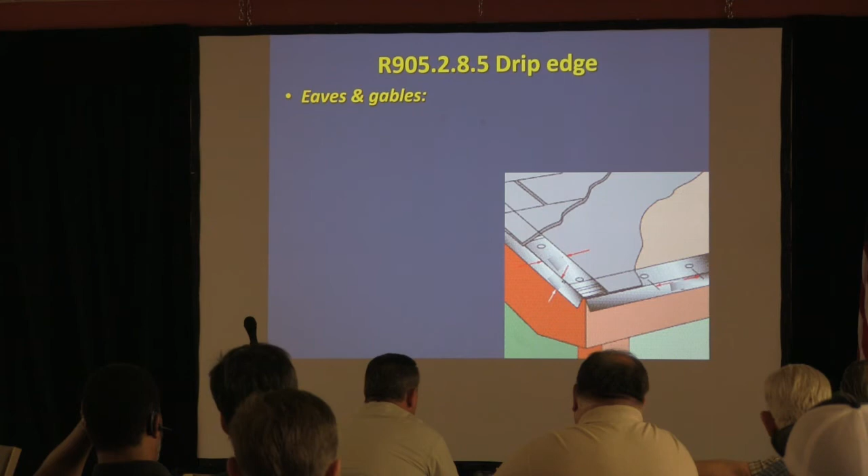Let's talk about drip edge for roofs. The code in chapter 9 says eaves, which are the gable roofs, that angle side. Gables are there, and then these are considered eaves. This is where the gutter is.

You're supposed to overlap any splices 2 inches. It's got to extend a quarter of an inch below the decking here, and it's got to extend at least 2 inches out onto the roof. These are minimums. If you fasten it, you got to put a fastener every 12 inches, and the underlayment is required to be over the drip.

So what happened is that drip edge didn't even go up to the sheet and get it. I did one yesterday, brand new roof put on, 5 days ago. The homeowner came home and said, 'Should I pay the roofer?' I said, yeah, that's okay.

Didn't touch it. The president of the company called me while I was at the roofing company. He said, 'I put 6 inch on there.' I said, he said, 'Yes, it is. It's right here on the paperwork.' I said, 'Well, why don't you come out? What's over there is not the same.' He said, 'Well, we're not having it fixed.'

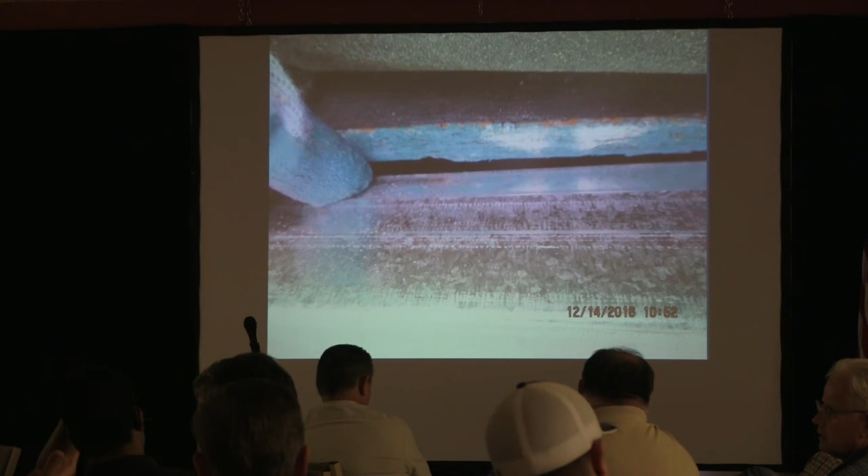Everyone was doing exactly like that. Yeah. I know. So they forget sometimes the builder's gap is 6 inches.

Well, some of the other problems these guys run into is it's really the responsibility of the roofers, but your trim guys are too. They need to put another 1x2 or something there, they need to put something there. They need to get their trim guys out first doing all that stuff, and then let the roofers put the roof on.

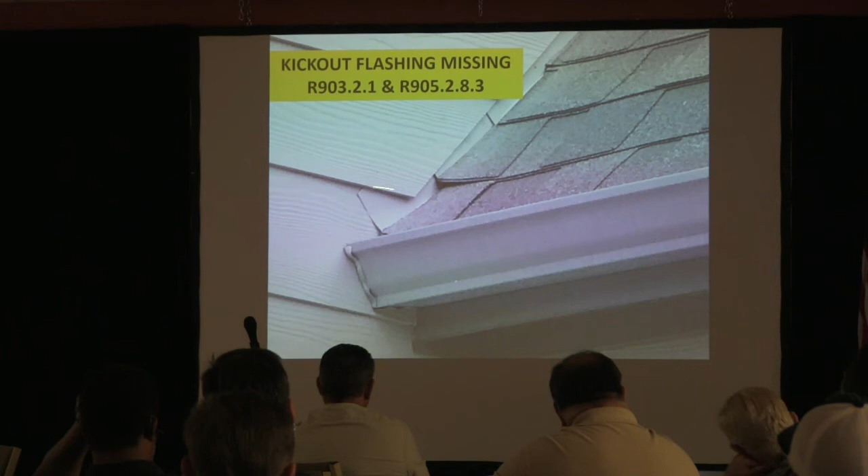This is a scenario where the flashing died in the wall and just poured into a chimney chase. So it's missing there. This is what it should be. It should come down and kick out over, like that. And then just a few more things you can look at.

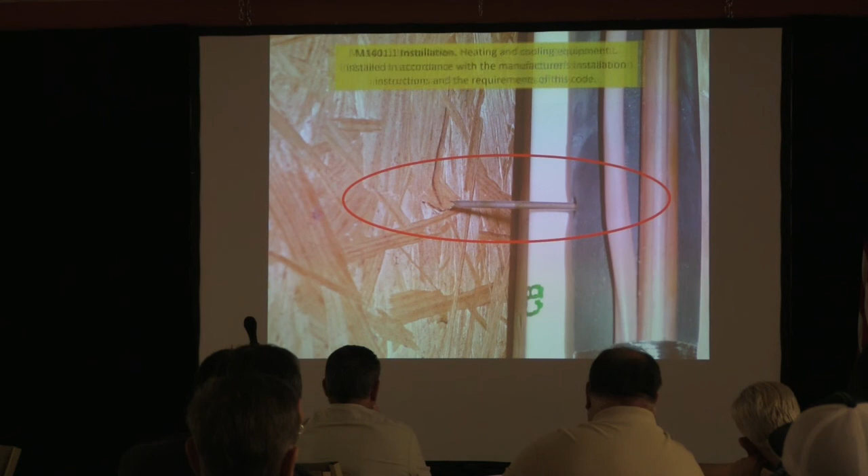Safety tempered glass, good time to check it. A lot of times the painters take the windows out and they don't put them back where they're supposed to. That's one thing, so you might find them there.

Yeah, Paul - a friend of mine's house just burned 2 weeks ago. 15-year-old house. The fire inspector determined that a staple had been driven through a wire, and then finally, over the years, it sparked and burned his house down. Wow, 15 years. You might have an opportunity to see that if they haven't put the insulation in.

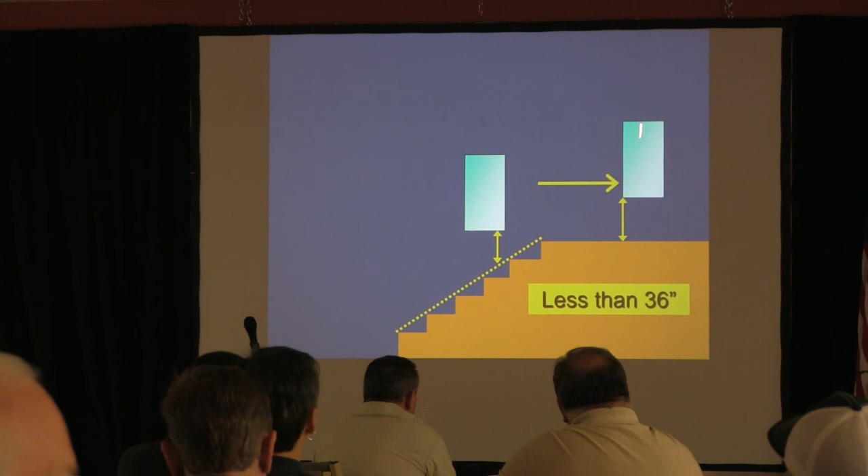I'm going to shift through this one real quick. This is the one we want to watch, stairwell stuff. If you've got windows in a stairwell less than 36 inches from the imaginary line that goes over the ends of the treads, and you're less than 36 inches at the top landing and less than 36 inches height, these are required to be safety tempered. You should see a label on it, permanently put on that glass.

Also, remember this landing too, the same thing. I don't like the change because it used to be less than 60, but now if it's above 36 inches, it's not required. But look here, watch these things - this is an area where you're required to do it.

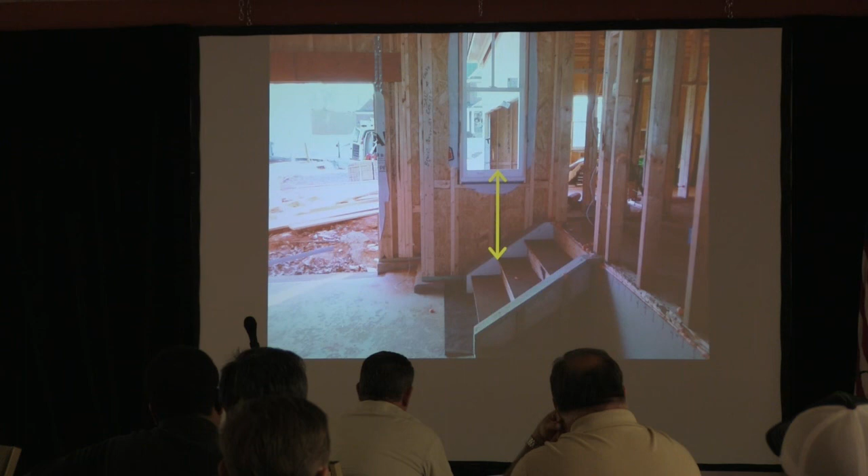So I got this on a framing inspection going into a garage. And at the bottom of the stair, it's less than 36 inches and within 60. So just some of these things you can actually look at the framing. So anyway, I'm done.